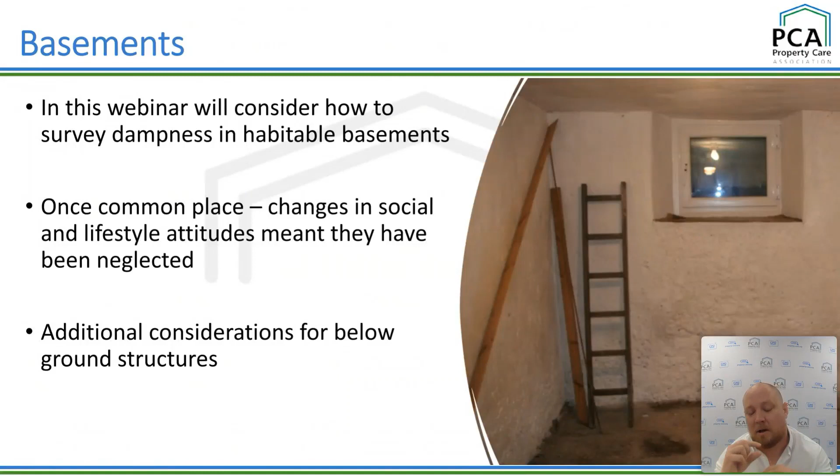We are going to be covering it from a domestic structures point of view as well. As far as I see it, if you're doing inspections of any property, at some point you're going to find yourself in a basement. When it comes to dampness in a basement, there are additional considerations, and if you're not aware of them, if you don't have at least a small understanding of them, there's the opportunity that they're going to catch you out, and no one wants that. So that's where we're aiming today, to increase awareness of those, so at least you'll have a bit of a mind as to what it might be, what it might not be, and when to go to get specialist help.

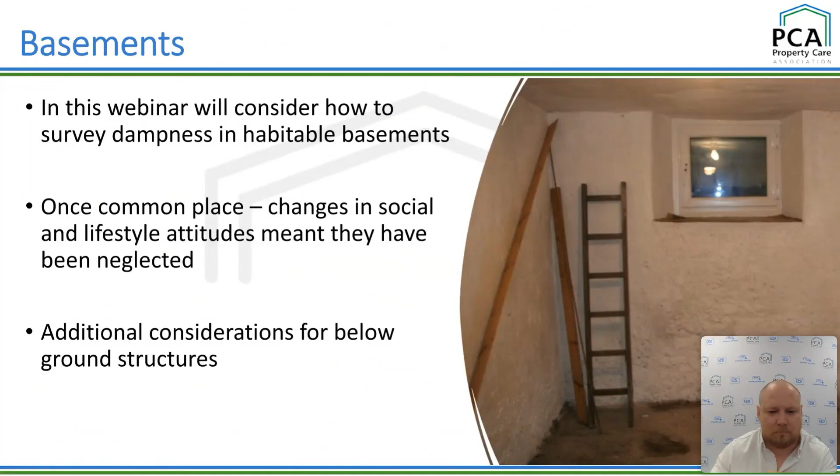So straight off the bat, do basements need to be dry? Well, in my opinion, no, they don't, as long as they are dry enough for its intended use.

To put that into context, I'm going to use a statistic that's a tiny bit out of date, from a BRE paper from 2004. It says there are 550,000 basements in England, of which 3/4 predate 1919. Bear in mind there's been a resurgence in popularity of basements recently, over the last couple of decades, as house prices increase, land values go up, and diminishing spaces in urban areas become more sought after, so we're increasingly going down. The 550,000 figure is probably a bit out now, but we're probably not far away. The reality is there's still a substantial proportion of our basements that are pre-1919.

So what were they used for? Why did we have all these basements so long ago, and why did they diminish in popularity? You've got to think about where we were at the time. Most were dampish and relatively poorly ventilated, but they were used for storage - storing food, water, coal, fuel, or even drying laundry. But they didn't need to be dry spaces. They were sufficiently dry for what they were used for, and that was enough. There's nothing wrong with that. If that's what you want a basement for, you can still use a basement for that.

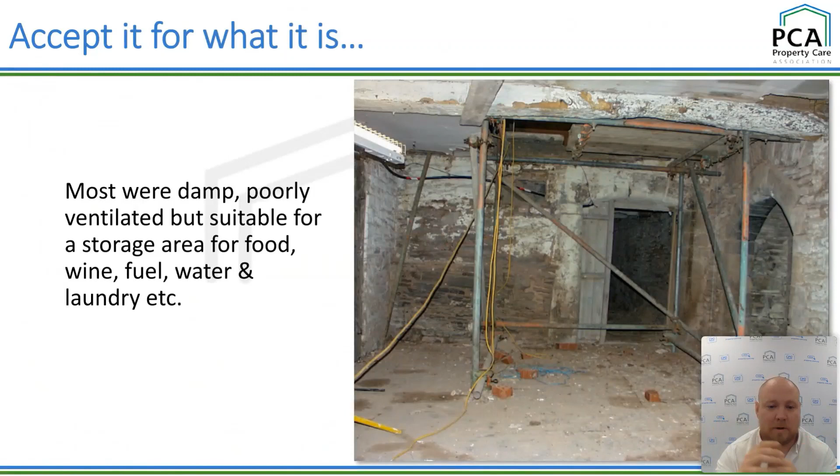If you find yourself in a structure like that, it's relatively simple and easy to survey. As long as it's ventilated enough, and as long as there's no risk to the structure, that's fine. You may want to keep it like that for retaining the heritage value of the property. However, the reality is not everybody is going to want a basement like that, and that's probably not going to be acceptable when you're looking at habitable spaces.

So damp isn't always tolerable, or the volume of water is where it becomes an issue. So what sort of damp - and we are going to start from the basics and build up - what sort of damp can affect our basements?

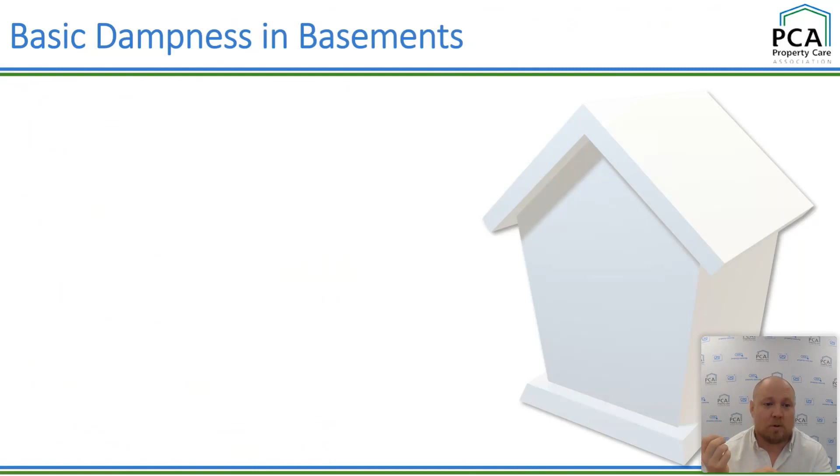Let's start off with capillary rise of water, rising damp. Obviously normally associated with our above ground structures, but the reality is if you've got a retaining wall in a basement, the chances are it's going to be below the level of damp proof course. DPCs are, by good building practice, always 150 mil above external ground height. So if you've got a structure that is below the level of damp proof course, it can absolutely be affected by rising damp, because there's probably very little to protect it from capillary rise of water.

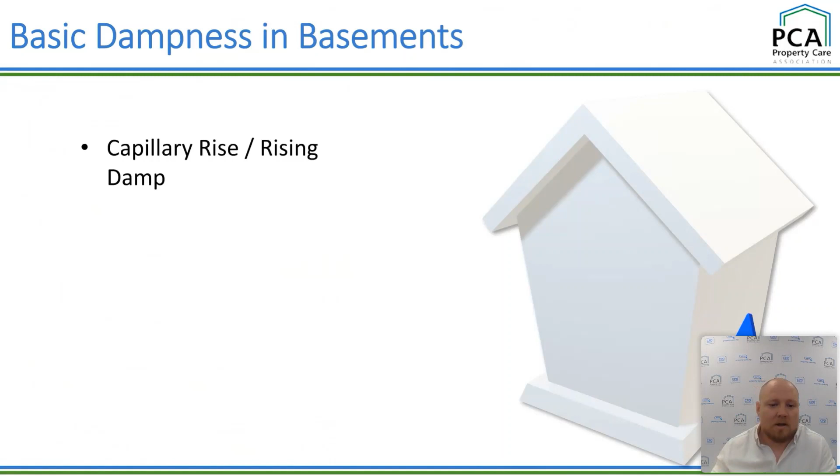Second, we have rainwater. Now that seems a little left field, admittedly, but bear with me. It feels a bit more topical today, though - if you're anywhere near the southeast or East Midlands, it's a bit wet here. But if you can cast your mind back almost 2 years to the day, where we were inundated with images of London underwater, but most notably a lot of basements with a lot of water in them.

One of the most notable cases was perhaps Brian May, who had a lot of headlines, lost a lot of musical memorabilia, because his basement was flooded. Having spoken to a great number of people that were out in the field at that time to try and get a feel for what was going on, it was not, by all accounts, that waterproofing systems were failing. It was because we had unprecedented levels of unseasonal rainfall coming down, causing flash flooding, and we had systems that were overtopped.

It was coming into light wells, and it was simple things like areas where there were dropped curbs - we were seeing flood water going over those and into basements that way. The other thing to bear in mind is we're seeing climate change, and the reality is our rainfall patterns are changing. Things like what we saw 2 years ago, and given today as well where we're getting a lot of rain again, not to the same extent, but we are seeing different rain patterns now. That's something we've certainly got to bear in mind.

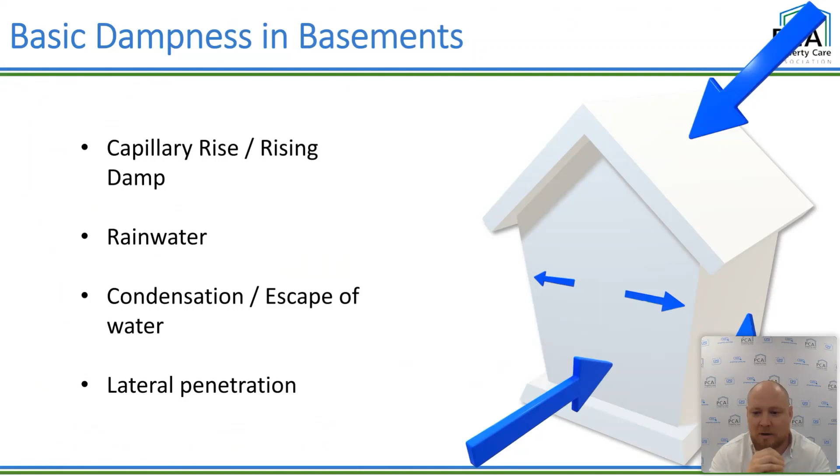I did a training course yesterday and it was all about presenting, and the one thing we were told was that we should only do 3 points. So if Steve's watching this now, his skin is probably crawling because I've got him put 4 points on the slide, but I couldn't really see a way around that one.

So there we are, moving back to the surveying aspects of it. When I last did a webinar, it was following the launch of the joint position statement, the JPS 22, a collaboration between ourselves, Historic England, and RICS, looking at the investigation and the effects of moisture on traditional buildings. Might not be the exact title, but words to that effect, but that was the title, and it's a pretty cool document.

One of the things I like about that is it tells us we shouldn't just be considering the structure, but we should be considering the surroundings as well. Now I'm not saying that's unique to that document by any means - for those familiar with 8102, and we will get to that in more detail later, that's been a premise sat in there for 30 odd years. But the pattern there is: don't just think of the structure, think of the surroundings, think of the context as well.

Think of things like topography. If you're sat at the top of the hill, actually there's some merit, some advantage to that. If you're sat at the bottom of the hill, much like we saw in the floods in London a couple of years ago, there's the risk of water percolating down, doing what water does, going to the lowest point and ending up in basements, unfortunately, or rushing down the hill and finding you.

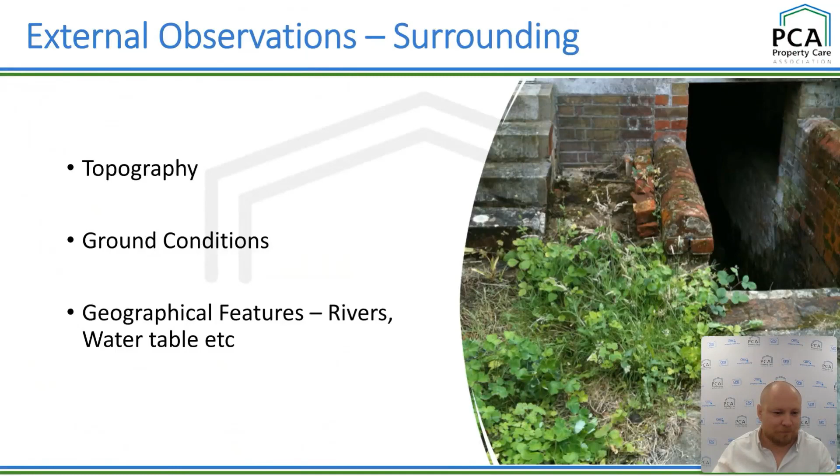So moving on to structure. Once you've looked at the surroundings, the context, then go to the structure.

I'm sure we all know someone that's done it, and I'm sure there's probably a few of us that have done it as well, and probably a few that aren't. Well, let's see if anyone's brave enough to admit it in the comments.

Don't miss the basement. Look for clues if there is something that might indicate that there is a below ground structure. It may be converted, it may not. Look for your light wells, your windows, pavement lights, all of that. Don't miss a basement. And once you've established there is one, establish what's the extent of it.

How high is it, how many retaining walls are there? Is it just a partial basement on one side? Is it fully retaining? If it's fully retaining, is it up to a metre, or is it up to full height? So check the extent of it.

But then check, is there any areas that extend beyond the scope of the original structure? Is there any deck areas, any vaulted areas, podium decks? They are areas that are notoriously difficult to waterproof and often prone to water ingress, but you should be checking for those as well. Other things to check for while you're doing your external checks, check for party walls.

Again, it seems obvious, but check where your abutting properties are. If you've got dampness coming through a party wall, is it originating from next door? Is it the source of the water?

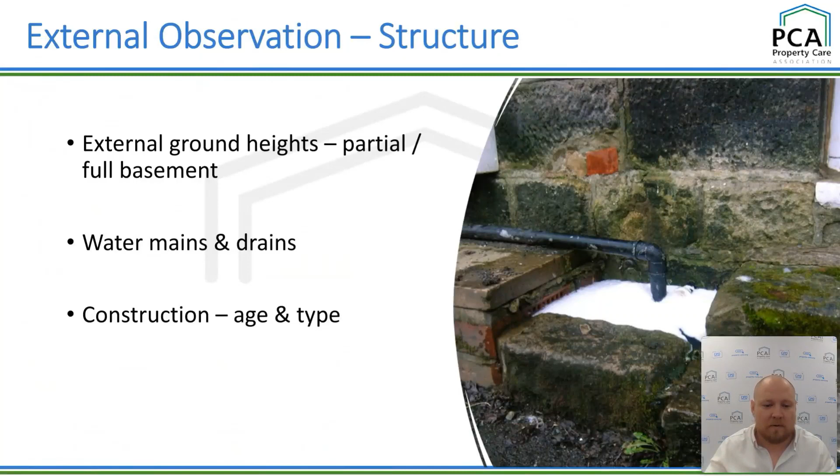Check light wells. Again, fairly obvious, we've already touched on it with the London floods a couple of years ago. But the last thing you want is, if you've got light wells, if they're not well maintained, if there's drainage in them, you need to make sure that they're actually working, that they aren't clogged like they are in this photo, that they have the ability to discharge water.

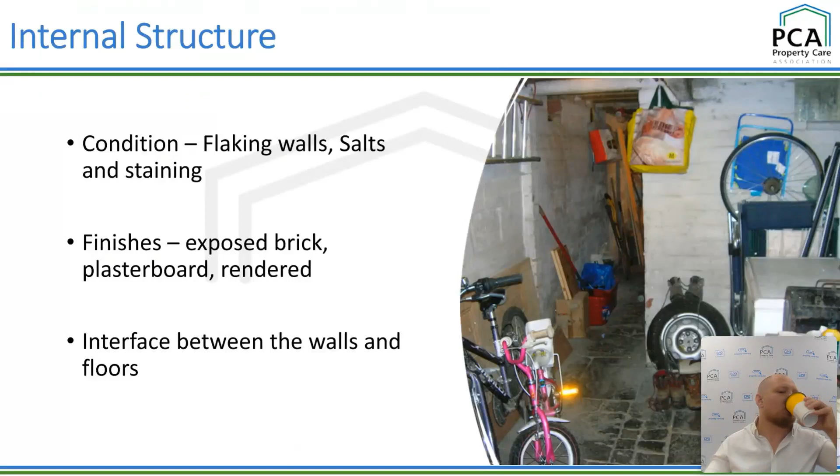So, internal structure. This is very much aimed at those that are doing the pre-acquisition survey, that sort of thing. If you're down in a basement, and particularly a habitable basement, and you're looking for signs that all isn't quite right, what sort of things are you looking for?

Stating the obvious: flaking paint, that sort of thing, salt staining, all of those would be a good indicator that there has been water ingress at some point. And the thing to bear in mind is that just because it's not wet at that time doesn't mean there isn't a history of water ingress, and there may be some telltale signs that that's happened.

Check the finishes as well, another important thing to bear in mind. So if you've got exposed brick, is there the presence of a waterproofing system? If you've got plasterboard, is it just a lining system, or is there actually waterproofing behind?

It's not unheard of for people to just stick a load of plasterboard in a basement and hope for the best - that's just a cheap bodge. Unfortunately, if you don't get good contractors who understand what they're doing, corners can be cut, and that doesn't always end well. So check for plasterboard, and if there are render finishes, that in itself could be part of the waterproofing system - worth bearing in mind.

With any structure, as far as waterproofing goes, there is always one inherent weakness: the wall-floor junction. You typically have two types of construction where they meet each other. So if you're inspecting a basement, always walk around the perimeter, because if there was ever going to be evidence of water ingress, that's where it would be - where those two construction elements meet, there's an inherent weak point.

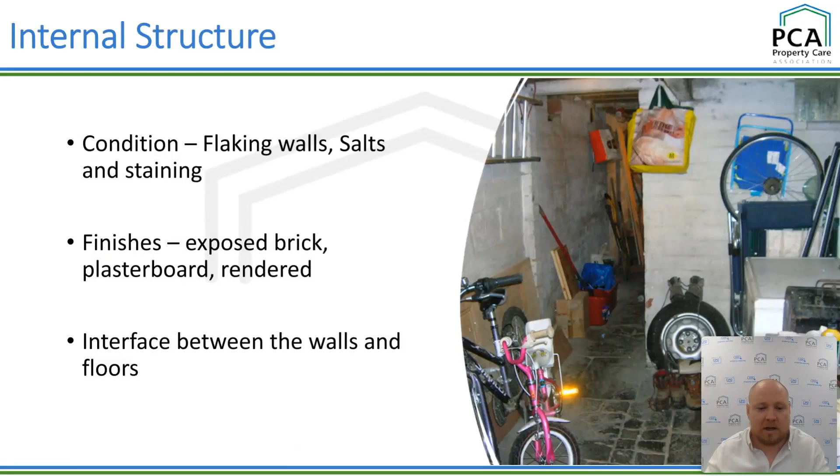Going back to our heritage for the Property Care Association, embedded timbers in wet environments are always at risk of timber decay. So you want to be checking for the risk of embedded timbers - the most obvious being your floor joists. Hopefully they're above the DPC. If they're not, you want to be checking the moisture content for those.

This is where your electronic moisture meter is invaluable. Moisture meters in basements can be of limited value - we'll get to that in more detail shortly - but when it comes to checking moisture for timbers, that's brilliant, that's what they're there for. Make sure if you've got built-in timbers, get as close to the built-in section as you can, take moisture content readings, and establish whether it's above or below 20%, whether it's at risk.

The problem is, if there's a waterproofing system, you may not know if all the timbers have been removed - you're never going to know that. But it's a consideration worth thinking about, particularly if there's a lining system. Another area to check is staircases. Newel posts, if they go through the waterproofing system, how are they terminated? Are they into wet soil or earth? Check the moisture content on staircases too - they can be very problematic with waterproofing systems, particularly with poor workmanship, as they might not be removed and could be embedded on the wet side of the waterproofing. So approach staircases with an air of caution and make sure they've been done properly.

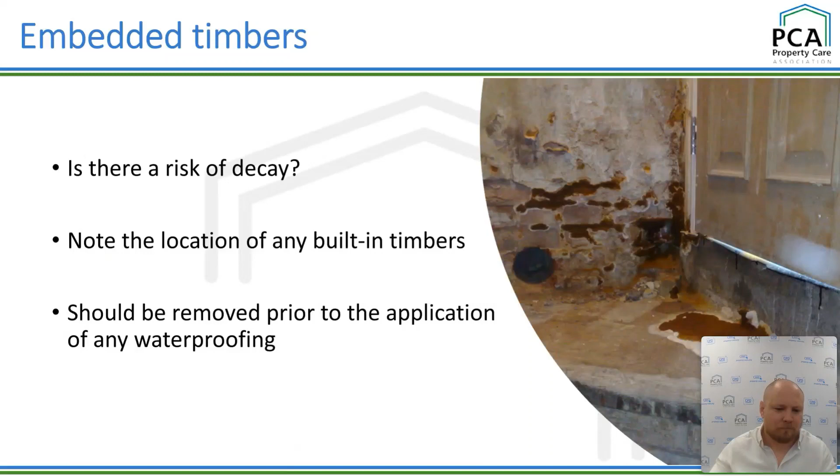I've already mentioned waterproofing quite a bit. The reality is, if it's currently being used as a habitable space, there's likely to be some form of waterproofing. If you can find it and it's readily visible, record the type and existence, ideally how long it's likely been there. But don't just check internally - check externally too, for land drains, their position, and whether they're maintainable. However, the reality is that in most basements, the waterproofing won't be readily visible - you're not going to be able to see it.

It's going to be brought up to a reasonable aesthetic standard. People aren't necessarily going to want to have whatever the waterproofing is as their finishes, so you may not know what's going on. This is where it actually starts to get difficult, because if you're going in there to do an inspection and you can't see where the waterproofing system is or how it's done, how are you actually going to give any reassurance to your client? That's where you're really at a disadvantage.

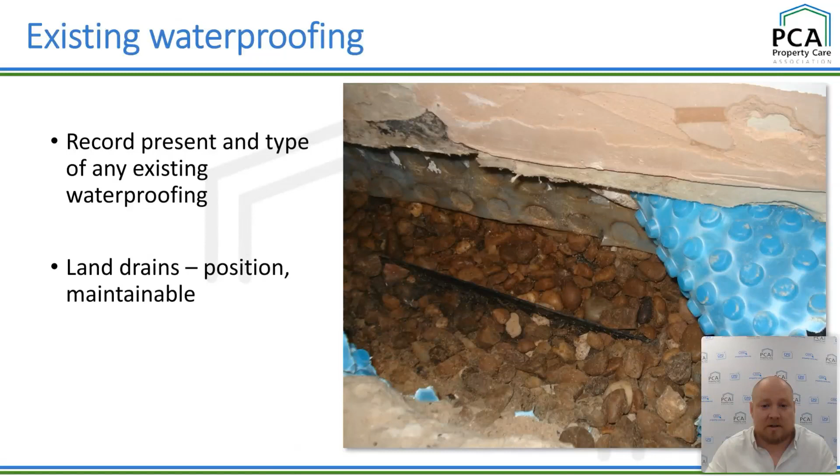So the best way, if at all possible, is to speak to your client. They might be able to give you the easiest way of establishing what the waterproofing is, when it was done, and how it was done.

But that's not all you should be looking for. Actually having that conversation with your client can give you some really good insight. It can give you an indication of the history of the property. Has there been any work done? Has there been anything removed? They can tell you whether it's actually failed in the past, whether they've had any issues, and they can tell you the history of the work and previous uses.

They should also be able to tell you about any existing guarantees. Most waterproofing work done by good contractors will come with a guarantee, typically 10 years, and most good contractors will be able to offer you an insurance-backed guarantee as well for that extra level of reassurance.

These are things that, if you are in a basement, you should be sure to check with your client.

However, not all waterproofers were born equal, unfortunately, and there are a lot of 'have a go Charlies' - I think that's an expression I've just made up - but there are a lot of people who see it as quite a lucrative market. They will have a go, but they don't necessarily have the relevant experience, skill, or understanding of waterproofing.

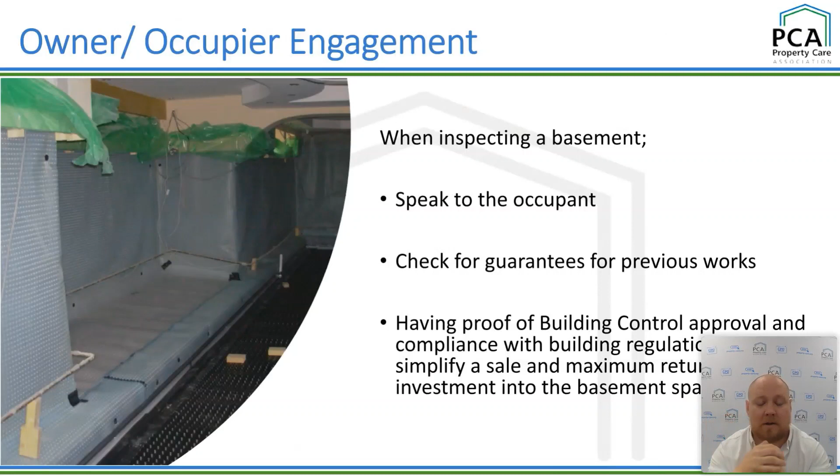If you are presented with paperwork or guarantees for that work, check who has done the waterproofing. Check their credentials - do they look like someone with experience? Are they affiliated with a trade association that regularly vets them, such as the PCA, of course - unashamed plug there. Have they got suitable qualifications? Can they demonstrate their competence through something like the CSSW certificate? All of these can give a surveyor an extra degree of reassurance that the waterproofing system is compliant and of a good standard.

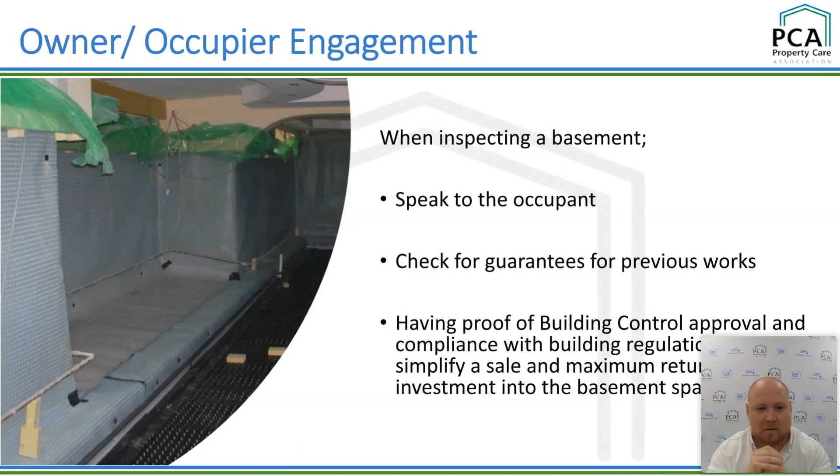So what does good waterproofing look like? If you're in a basement, what's the standard you're trying to achieve? If you look at the building regs, approved document C - which is all about contaminants from the ground and moisture - the one thing it tells you to do is essentially refer you to this document: BS 8102. Now, this is a bit of the cornerstone for the waterproofing industry, and the reason it's the cornerstone is that it has a proven track record of keeping basements dry. If waterproofing is designed to this standard, you can have a degree of reassurance that it should have been done by someone with at least some knowledge of waterproofing.

This is what, if you've got a system designed probably within the last 30 years, is the standard you should be trying to look for them to waterproof to. First introduced in 1990, it was originally just looking at keeping groundwater out. There was a revision in 2009, and more latterly, last year in March, there was the latest edition, which now tells us to start considering all water ingress into underground structures. I think, given the climate changes we're undoubtedly going to face, that is the right thing to be doing. This document gives us guidance on how to keep water out of our underground structures, and it considers a design philosophy that should underpin all waterproofing design - it's a risk-assessed approach.

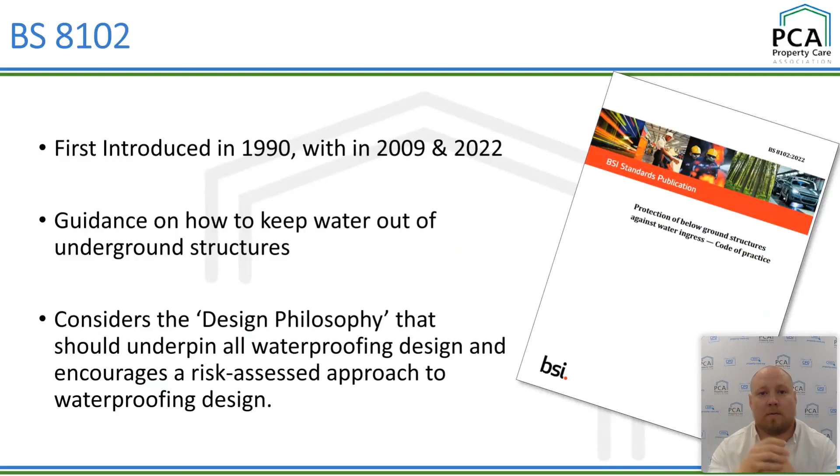So the document itself sets out grades of waterproofing, and then it sets out methods that can be adopted to achieve that level of waterproofing or water tightness. These are the 3-4 grades of waterproofing that it sets out, and we're kind of back to the premise of controlling water depending on the use.

So can you have a wet basement? Yes, you can, depending on the use. For habitable spaces, which is what we're talking about today, it's going to be a grade 3. Grade 3, working backwards, is no water ingress or damp areas acceptable - essentially no water ingress allowed, but it's got to be ventilated, dehumidified or air conditioned appropriate to the use. That's your habitable space.

Then you've got your grade 2, typically a car park or lift pit by example, where you're allowed no seepage. Damp areas are acceptable, but only if caused by condensation, essentially. So it's just that degree of internal environment that is changing between 3 and 2. And grade 1 is much wetter - they vary slightly, but typically that might be a light well or something like that.

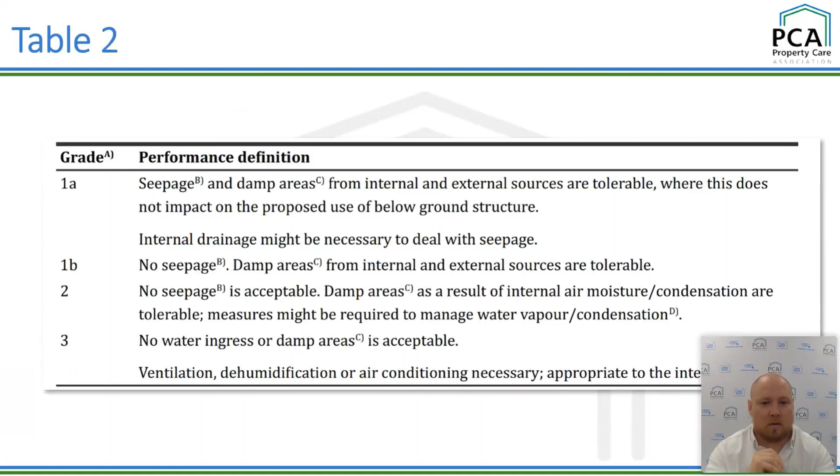So those are the grades. And if you're presented with a report for waterproofing and it's a habitable area, you want to see something that realistically is going to be waterproof to grade 3.

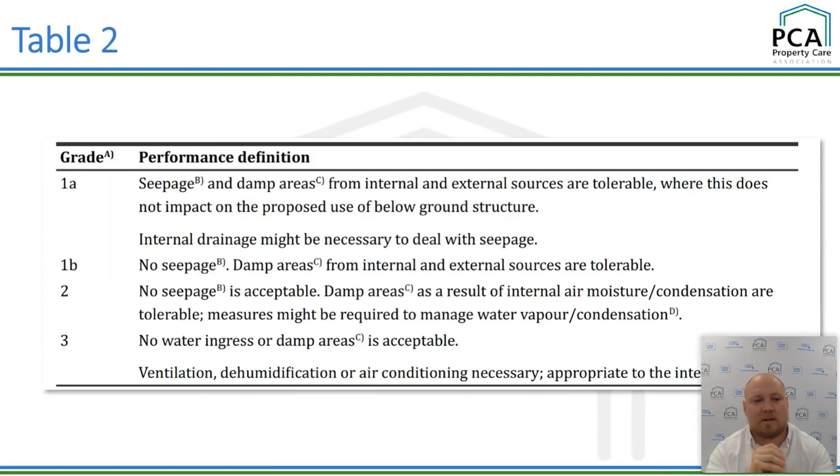It then sets out standards or types of waterproofing that can be employed to achieve this. Now, these are broad categories and there are individual products - I'm not going to go into much detail on all of those, but they all work on different principles. Type A is a barrier - a means of preventing water ingress into the structure, acting as a membrane or something that physically blocks water going in.

They can be applied internally or externally. Historically, you could see them applied within the structure itself, sort of sandwiched, but because of lack of repairability, that's not always desirable, so that's been shied away from nowadays.

Type B is where the structure itself provides the resistance to the ingress of water. So that is essentially waterproof concrete designed to certain grades. It could be sheet piles as well, clutch welded, but typically it's going to be waterproof concrete. Now, type C is a drained cavity.

This is more of a management system. You're accepting that you may get some ingress of water, but then providing provision to deal with that water. The water comes in and is managed through a series of drainage channels. You've got to create a void to allow water in, and deal with it, so you've got a habitable space which is dry, but you're dealing with it internally. Depending on the level of risk, you might use two or more of these systems, but those are the 3 systems that are broadly out there.

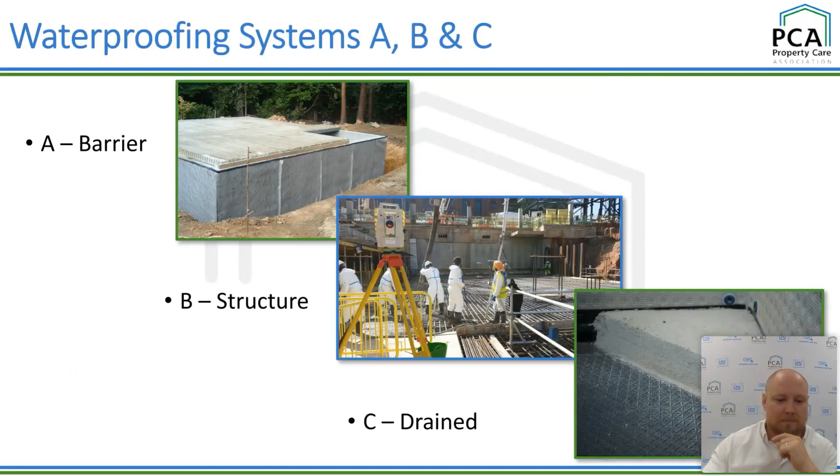So, utilities and penetrations - I'm keen to mention these because if you're doing a survey, these are essentially the bane of all waterproofing systems. Basements make a pretty handy location to hide gas meters, electric meters, any of these things. The problem is if they're put in, particularly after the waterproofing, or even if they're not moved during the waterproofing, you have areas of potential weakness.

If you've got waterproofing, it needs to be continuous. If there are discontinuities, then there's the area for potential water ingress and failures. You may see that around penetrations such as light wells and things like that as well - we mentioned that fairly early on. So check the detailing. If you've got returns around windows, things like that, they might often be neglected or forgotten about, so make sure you check those. Check for continuity with walls and floors.

On light wells, windows, these sort of things - it's not really our area of expertise, but I think it's probably worth noting.

There was an incident up in Leeds not so long ago where unfortunately there was a fatality due to a fire in a basement which didn't meet building regs, but some of the escape routes were compromised. So it's always worth being vigilant on that.

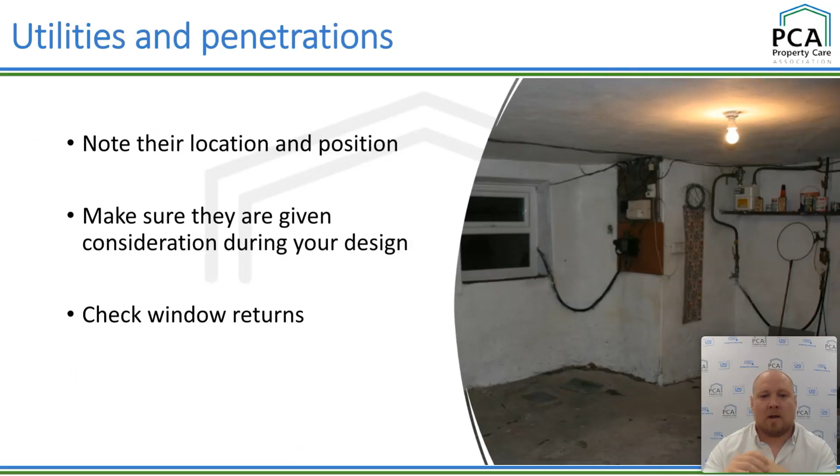Waterproofing - we've already established that most basements are pre-1919. So not all waterproofing is going to look like that stuff that we've just seen. There could be basements that predate 1990 that are doing their job sufficiently well, well before the guidance we've just been talking about.

So I promised you something a little bit novel and a little bit different, and we're going to go into that now, so hopefully it'll be something interesting for you - some of the early forms of waterproofing that you might encounter.

Anyone who knows me knows I love to delve into an archive, and that's exactly what we've done here. This is from an English Heritage book, and it essentially tells us that what they've recommended for historic basements was essentially a lime wash, lime plaster and hydraulic additives. And then if it got bad enough, you just wipe it down, start again, or remove and go through that.

I kind of can buy into that, but I kind of can't at the same time. I think tolerance will be fine in some spaces. I'm not personally convinced that that's an approach they would have adopted for habitable spaces.

As far as some of the earliest forms of waterproofing in this country goes, the English Heritage books allude to evidence of waterproofing - pitch and resins and waxes being used as early as 1319. One of the earliest examples was the Old Palace of Westminster, where they were putting pitch onto the foundations to try and prevent ingress from the Thames. So that's one of the earliest examples, obviously not in existence anymore, but there's evidence of waterproofing products being used as far back as medieval times.

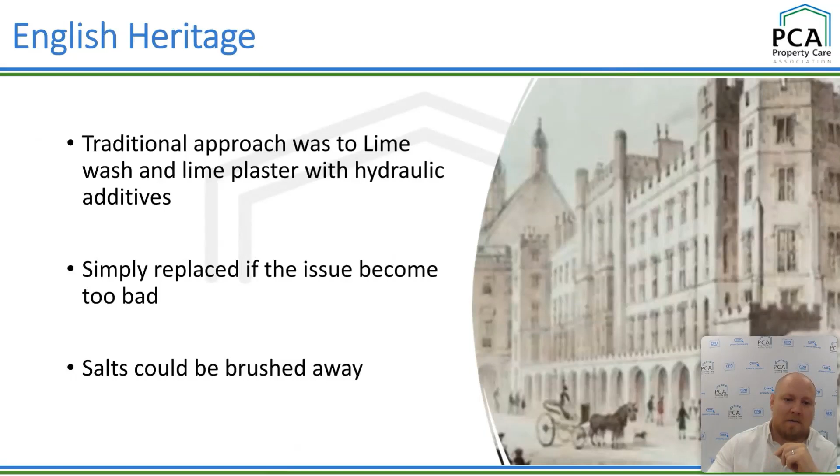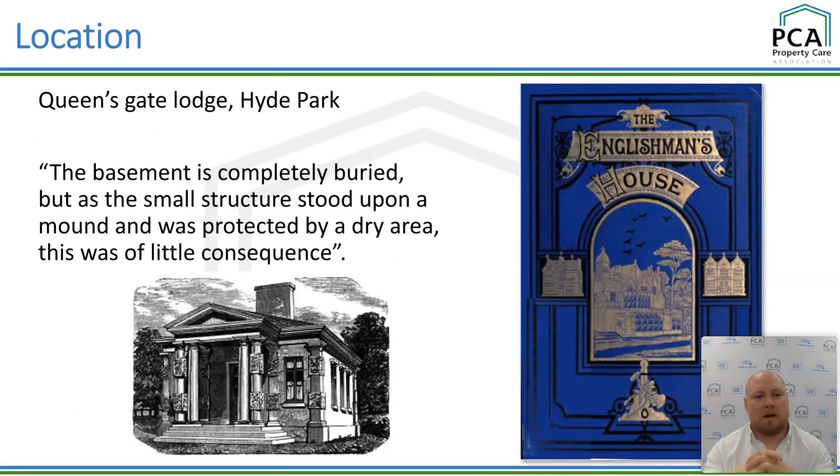More recently - this comes from Jervis, who many of you may know, quite an interesting book, The Englishman's House. It's from 1874, and it's about Queensgate Lodge in Hyde Park, a small structure, but it's got a basement to it. It tells us they kept this basement dry. The basement is buried, but as the small structure stood upon a mound and was protected by a dry area, this was of little consequence.

So what they're saying here is essentially, because land wasn't so scarce back then, there wasn't such a premium, they could be more picky about where they wanted to build a basement. If they thought it was going to be a risk, they wouldn't build it there. If they thought it was going to be dry, they could take that advantage. It also explains that they'd be using topography to their advantage as well - stick it on top of the hill and it's going to be less risky. But it also talks about these dry areas.

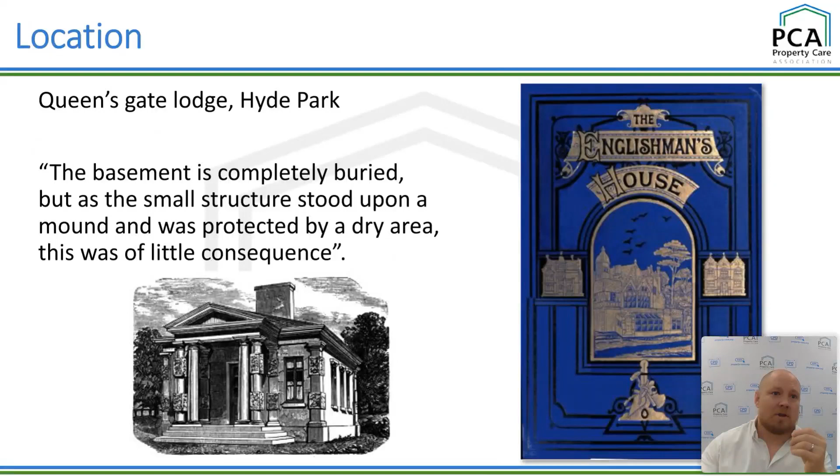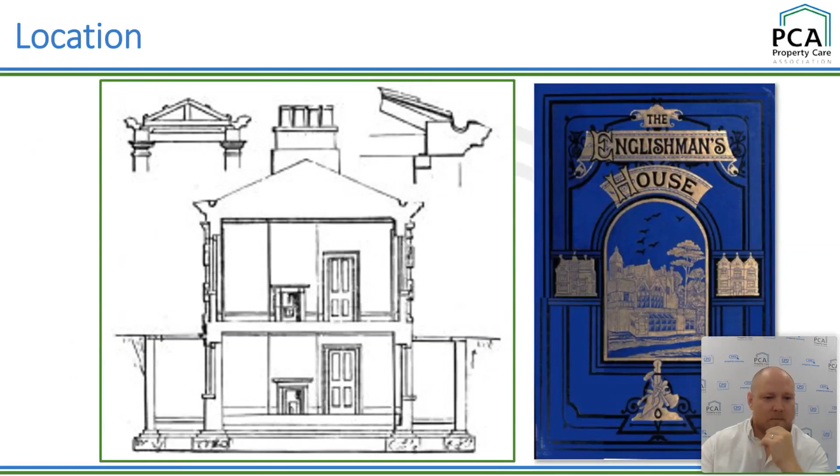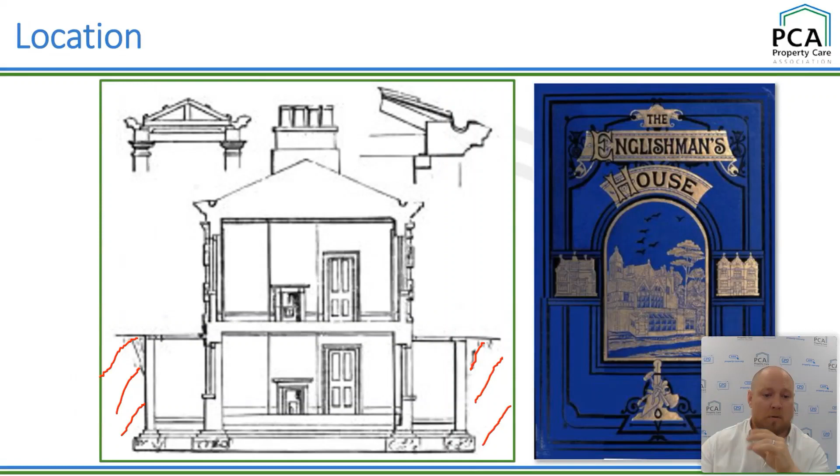So what are these dry areas? You can see this is the structure and you've got two habitable rooms quite clearly. What they've decided to do is move the retaining walls away from the structure. So you've got your retaining walls here and here, and what they've done is essentially create a dry habitable wall on the structure by moving the retaining wall away - solved your problem. There are your dry areas. That's from 1874.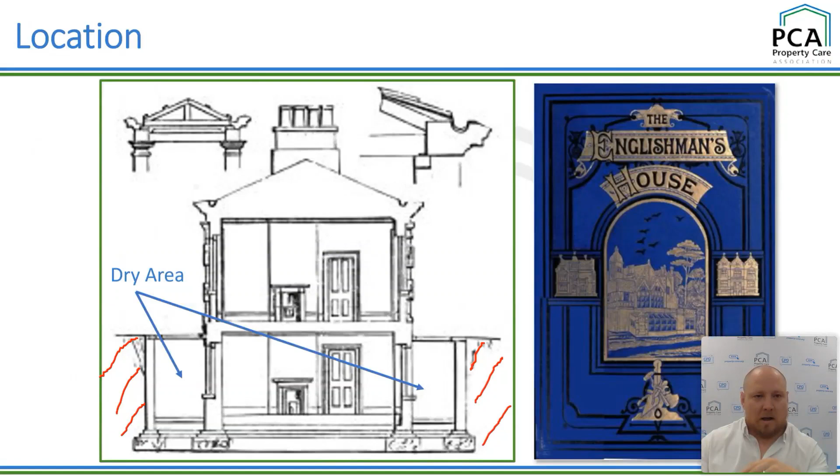And it is an approach that got continued. So 1907 - this is from another book, thanks to my colleague Ross for sending these across. You've got similar things where they are using this sort of dry area to keep properties dry. On the side, you can see it's essentially an early form of cavity construction, cavity drainage construction - dry area, water comes in and discharges away. Similar thing in the middle, and on the right you've got an early type A barrier protection.

I realise I'm running out of time, so I'm going to route through a little bit quicker.

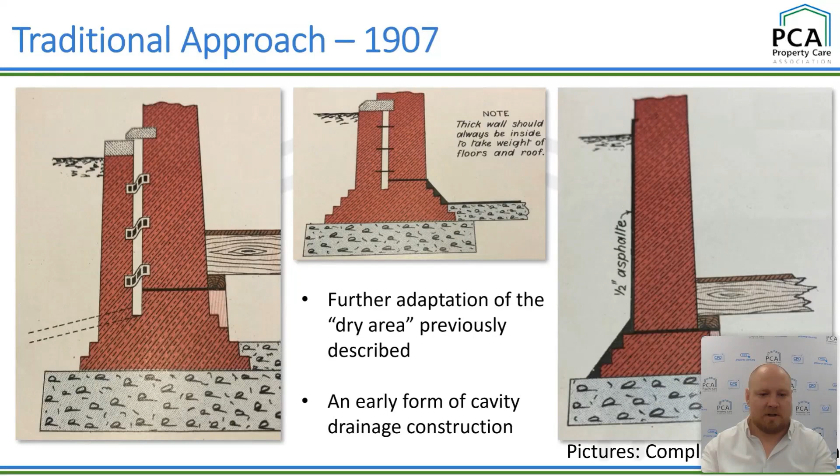Cementitious renders are another thing. Sika is one of the big brands, one of the more popular brands out there for cementitious renders. Essentially founded in 1920, as far as the UK goes, it became popular because they could be used internally, so retrospectively on basements. Hugely popular, could resist huge heads of water. So cementitious systems became something that was popular.

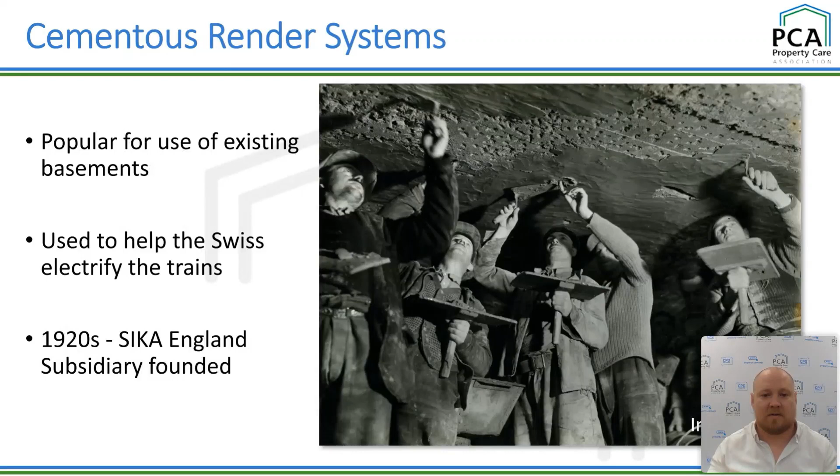Just to spread some love, another one you may come across in an existing basement is a Newtonite lath. This is essentially another form of waterproof barrier. I've seen it quite a few times in basements, but it's more or less a membrane - it hits it, and you've got a dry inner surface. Typically from post-war period properties, you may see something like that in there.

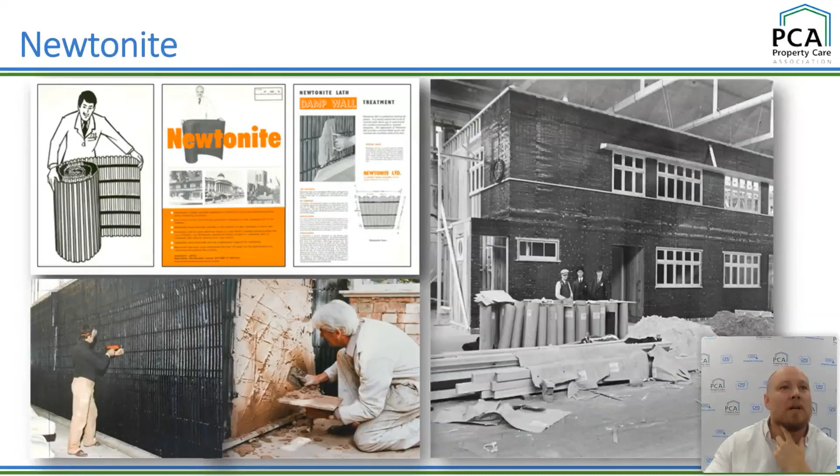However, I already said moisture meters will be of limited value in a basement. So to expand on that, the value of moisture meters could probably be debated all day. They do have some value and they are very good at what they do, but you need to be very careful of the limitations of what they can do in a basement.

If you look at those systems we've just looked at, where you've got a render or a membrane, if you're using a moisture meter on a scan facility, the problem is that behind that barrier is always going to be wet by definition. So you're going to get wet readings all the way up the wall. It doesn't mean there's a problem - it just means you've picked up that the barrier is doing its job because it's holding back some water. If there's no visual evidence of a problem, then it's doing its job very well.

So be careful with your surveying equipment when you're in a basement. The other thing to bear in mind - you might think you can get around it using your pin modes. Be careful as well, because if you stick pins into a basement wall, or drill and try to use your deep probes, you're going to run a risk of compromising the waterproofing system. That's the last thing you want, because a pinprick in a waterproofing system that's holding back a body of water means the next thing you'll see is water coming through.

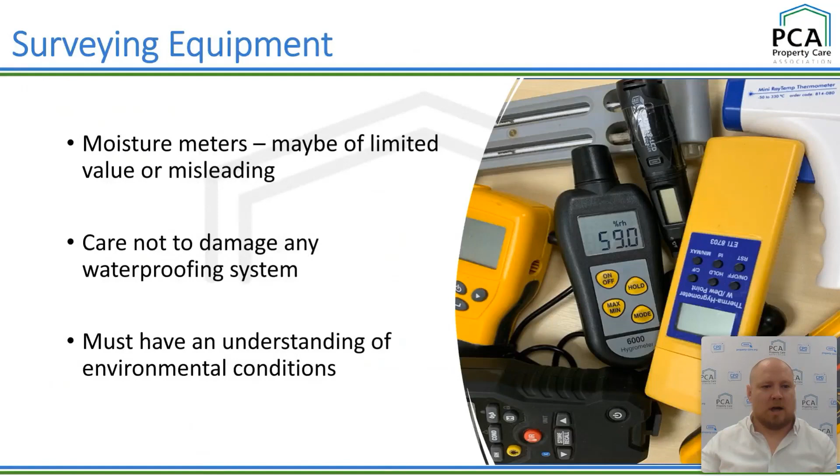Another really popular form of waterproofing in modern structures, popular since the mid-80s, is cavity drainage membrane. The plastic form has been around since the 1980s - essentially you're allowing water through, it hits a membrane, drains down, and is then seen off by drainage channels. Some of the early versions didn't necessarily have the same provision of drainage or drainage channels, so bear that in mind as well.

But drainage channels come from about 2000. Now the problem with this, obviously, water comes in, it's dealt with by a pump or gravity drained. You've got to ensure that, particularly if there are pumps, they are maintained, always working, and serviced. These systems are dependent on maintenance. So if you do encounter a cavity drainage system in a basement, you've got to make sure there is a sufficient program of maintenance.

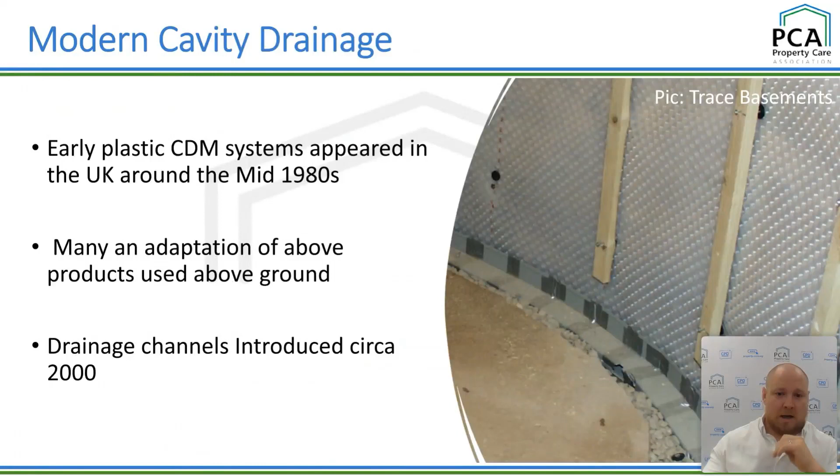So what might that look like? Well, ultimately, with drainage channels, you should have points of maintenance, so you can jet through the system to clear any blockage. If you're in a basement, you might find something like this - a quite discreet drainage cover, a drainage port, where you can flush a waterproofing system. There are various types - some might look more like a letterbox, others might simply look like a screw cap sort of thing. But there are various types of maintenance points out there.

But if you suspect you've got a Type C system, you should be looking for how that maintenance can be carried out, and look for service schedules as well for pumps and things like that.

Another novelty for those that are more long in the tooth as far as the industry goes—has anyone seen something like this before? This is another predecessor for cavity drainage, where you've got these tripod-type tiles with a void underneath to let water run through, and a bitumen coating on top. It's in a triangular format, but there you go, another predecessor to cavity drainage as we know it today.

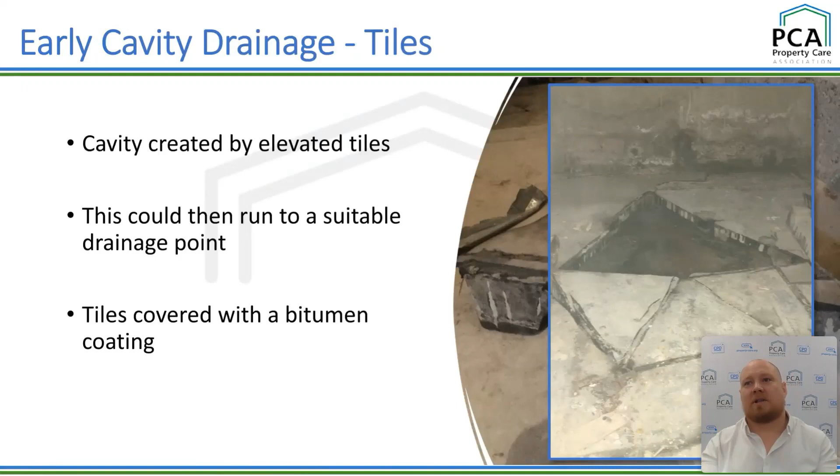On the home straight, we're going to look at condensation. I'm sure most of you know what condensation is, but it's essentially water going from its vapor form back to its liquid form. Basements tend to have an inherently greater risk of condensation.

Typically they have less air exchange—they won't have the windows, they won't have the infiltration—so you tend to have less air exchange. If you have less air exchange, you tend to have a greater build-up of moisture, and that can be problematic. Not only that, but basements tend to run a bit cooler as well.

So if you've got basements running cooler, perhaps this diagram will illustrate it better. Relative humidity is the amount of moisture vapor in the air expressed as a percentage of the maximum it can hold at a given temperature. The warmer the air, the more moisture it can hold. So if air comes into a cooler basement, the chances are you're going to increase the relative humidity. You've got the same volume of water, but because the temperature decreases, the air can't hold as much water—you reach the capacity it can hold, and then condensation occurs.

So be mindful that you may get condensation in basements as a result of that.

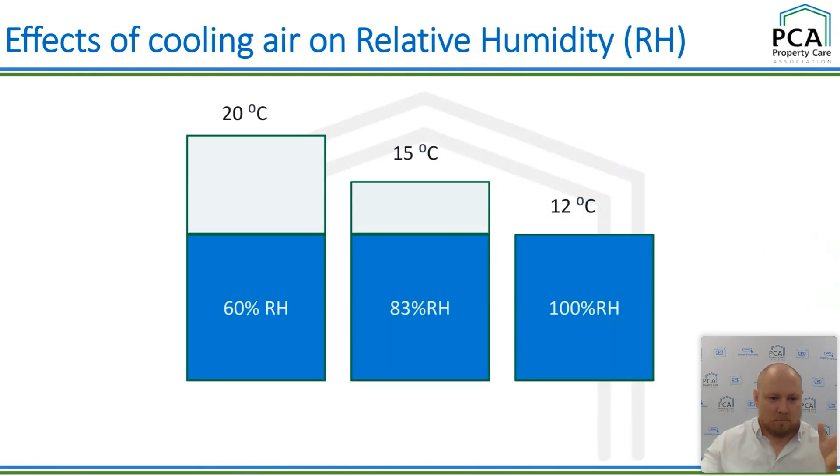What's the visual evidence for condensation in basements? Well, it's the same as you get above ground—you're going to get your run marks, but that can be deceiving, because if you're getting run marks, is it a failure of the waterproofing, or is it down to condensation? That's where it's essential to establish what's going on with the environmental conditions, because you don't want to do anything that compromises the waterproofing system.

So you should go in with a hygrometer and surface thermometers—can you check whether dew point is occurring? Another thing to bear in mind: above ground we have a condensation season, because we need a temperature differential between inside and outside to cool the air sufficiently to cause condensation. So above ground we have a condensation season, typically October to April—the colder months is when we have condensation.

It's not that cut and dry with basements, because due to the thermal mass of the wall, they tend to run a bit cooler. Particularly in summer, you can have an ingress of really warm, humid air into a basement, but because you've got a cool wall from thermal mass, condensation can occur within a basement even in summer. Be mindful of that, because it could give you a reading in the middle of summer, and you may instantly discount condensation when it could actually be occurring.

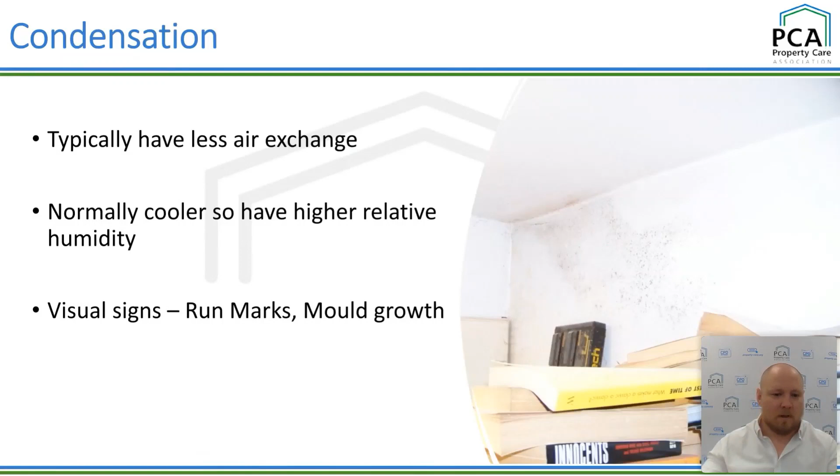So if it's a habitable space, it needs to be ventilated—we established that when we looked at 8102 and our three grades. It needs to be ventilated appropriate to use. If it's a habitable space, that means appropriate to Building Regs, Approved Document F. So if it's ventilated to Approved Document F, it should be commissioned, and it's got to be maintained as well—so is there a record that it has been commissioned?

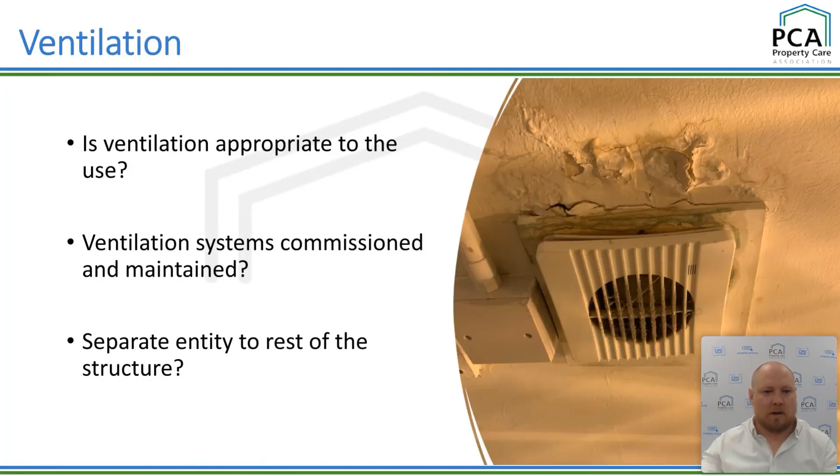So two more slides before we can get on to questions. One last thing on vapor control, just to dispel a few myths.

Where water tables are low, it can be shown that for grades 1, 2 and 3, the internal vapor pressure is usually higher than the vapor pressure in the ground. With vapor pressure, high pressure moves to low pressure, much like a weather system, trying to reach equilibrium. So what you tend to get, if you've got a low water table outside but moisture production from your internal environment, is vapor drive going from inside to outside. You don't tend to get it coming in.

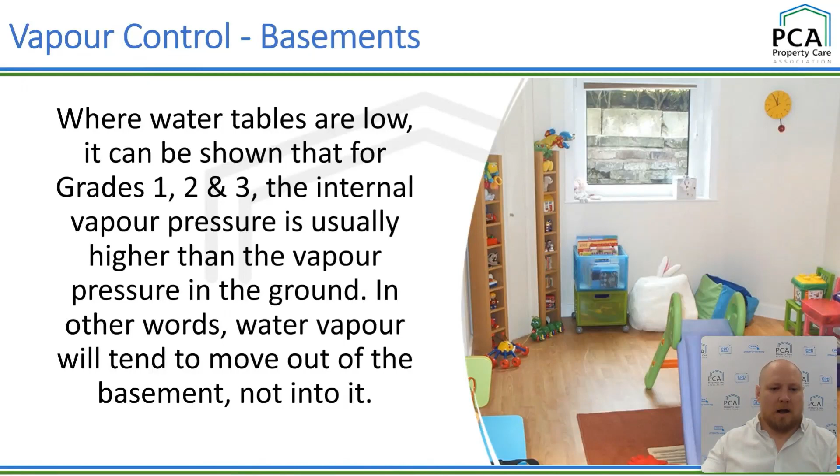If you've got high water tables, water vapor will penetrate, but at such a low rate that it's normally of no significance. For example, if you've got a type B concrete basement, 10 metres by 10 metres by 300 mil thick, under a 10 metre head of water at 15 degrees internal temperature, vapor will penetrate, but at such a slow rate that in 24 hours it will only increase the relative humidity by 1.5%. And that's in a totally unventilated area. We know nowhere is completely unventilated - there should be provision for ventilation, and if it complies with building regs, there should be several air exchanges an hour. So in reality it doesn't make that much difference.

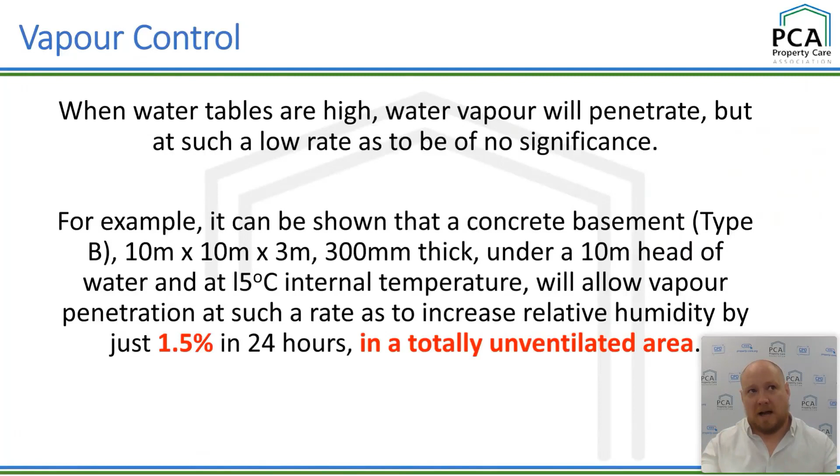So to wrap up, basements can be tricky to survey. They can be tricky because you may not have access, much like that room there. You've no idea what the provision for waterproofing is. There may be some subtle signs, and it's on the surveyor to either identify them or suggest they go to someone who can. Understand whether the design is compliant with 8102, particularly if it's been done in recent years.

Other things - know the limitations of your equipment as well. We've already established moisture meters are of limited value, or can be of limited value, so just be careful. If you're using them, use them with a degree of skepticism - you might not necessarily get a reading because of a failure or anything like that. Everything could be fine, or it could lead you down the wrong path. So you shouldn't use it in isolation, but use it with additional knowledge and other equipment as well.

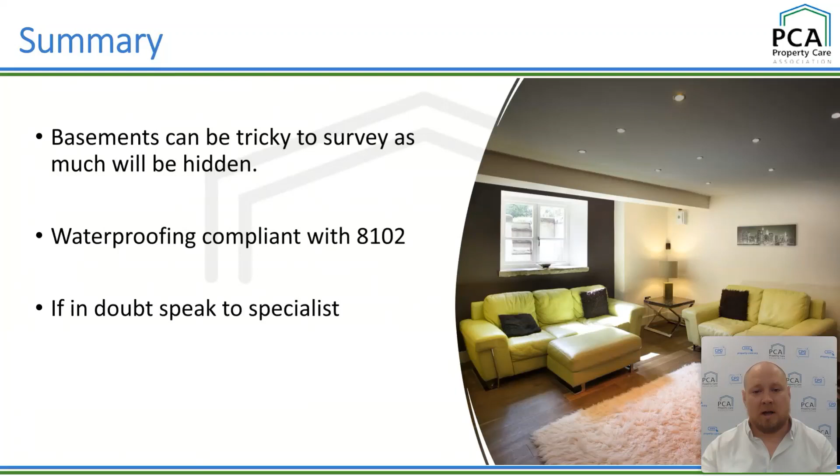And, Andy, you'll be pleased to know, I think I'm a few minutes over, but there we are.

Well, James, many thanks for sharing those insights. I think on behalf of everyone, I just want to say thank you for sharing your knowledge there - that was another great presentation. I do have a quick question though, just before we go into questions.

You mentioned at some point halfway through the webinar about not missing the basement clues, that there's a below ground structure. That really surprised me, because I actually thought in this day and age, when property values are so high, that basement spaces were a very desirable space if you've actually got it. I mean, why would someone hide a basement? Is it because they're simply completely unaware of it?

Not everyone wants them, do they? They're damp, and getting it done properly isn't cheap. Some people, you know, there's a lot of terrace places that just simply don't use them. If you can afford to have it done, it's a nice luxury - some people might just want to use it for storage. There's no hard and fast rule that says if you've got a basement, you must use it. Particularly in the past, they went out of fashion because they were damp and not particularly well ventilated, and might have been seen as a burden.